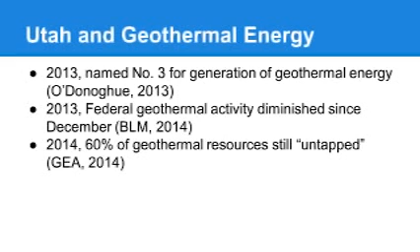According to the Bureau of Land Management's program overview for 2014, 60% of geothermal energy resources in Utah remain untapped. Important points worth mentioning are that Utah's leasing of federal lands for geothermal energy production has been highly competitive. Clearly, this means it's worth the trouble for any alternative energy investor.

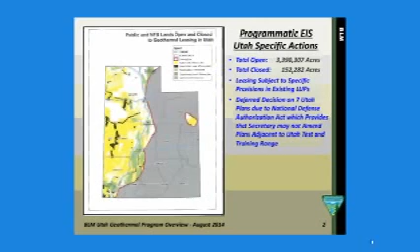From this picture provided by the BLM Utah office, there are still many lands open for geothermal leasing. These were the specific leases provided in 2014. This should let you know if investing in geothermal energy in Utah is a good idea for you. If you are interested, this is the regional power transmission infrastructure that exists or was proposed in 2012. It may or may not be different now.

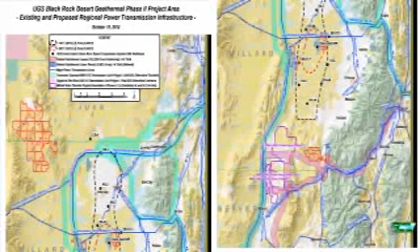Utah is definitely an option if you are looking into geothermal energy, and should be considered. We hope this information will help you make a better informed decision about your opinions on geothermal energy in Utah.

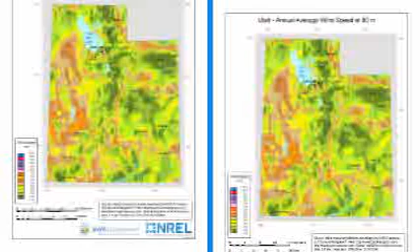If wind energy is what you're looking for, Utah definitely has the potential in several locations. We also hope this has helped you make a better informed decision on your opinion of geothermal energy and wind energy.

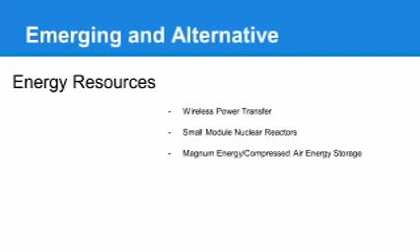There are a few new emerging alternative energy resources which look like they could be very promising for the future. The 3 that I'm going to talk about are wireless power transfer, small modular nuclear reactors, and compressed air energy storage. Utah is blessed to have some of the best science and technology research and development departments in the country, including Utah State and the University of Utah.

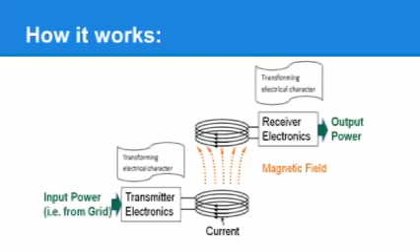Another possible solution to intermittent energy of renewables may be Magnum Energy, which is compressed air energy storage underground. Compressed air energy storage is a bulk energy storage technology that enables the storage of off-peak power from renewable energy sources like wind and solar. The CAES process involves converting renewable power into compressed air that can be stored in commercial-scale solution mine caverns. This stored air becomes an energy reserve that can be released to produce electric power at any time.

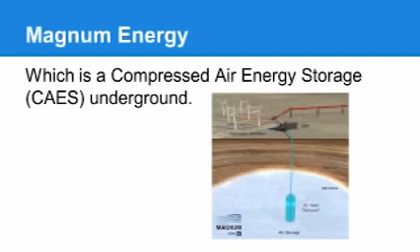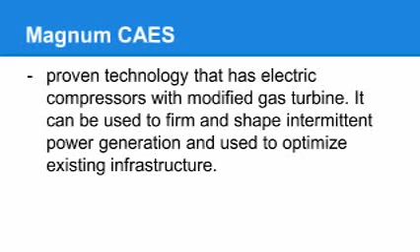Magnum CAES is proven technology that has electric compressors with modified gas turbines. It can be used to firm and shape intermittent power generation and to optimize existing infrastructure. Currently, there are 2 operating facilities, one in Alabama in service since 1991, and one in Germany, in service since 1978.

Large-scale nuclear power has been around for several decades, and there is a lot of concern when it comes to a large-scale power plant, especially after the incident in Japan at the Fukushima nuclear power plant in 2011. However, there has been a new kind of nuclear power which several countries and states within the United States are turning their attention towards, including Utah.

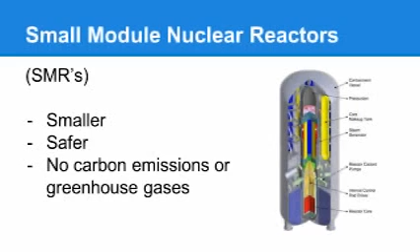Small-scale nuclear reactors are what we are speaking of. Yes, the power is still nuclear, but on a much smaller scale. With nuclear power, you have a constant supply of energy which is safer for the environment due to no carbon emissions or greenhouse gases.

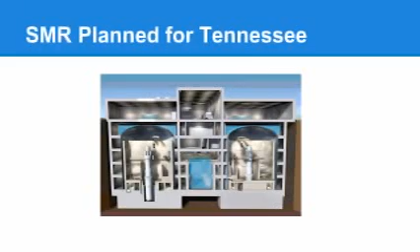Small modular nuclear reactors, like the one illustrated here by the firm Babcock and Wilcox, bring together components that are usually housed separately at full-scale plants. Like Tennessee, engineers everywhere are hard at work in hope that they will lead a new energy future. 'SMRs are a very promising direction that we need to pursue,' said U.S. Energy Secretary Ernest Moniz at his confirmation hearing in April.

Nuclear power is usually big power, so the effort to downsize marks a significant change from business as usual. 4 of the 10 largest electricity stations in the world are nuclear powered, and the average size of U.S. nuclear reactors is more than 1,000 megawatts, large enough to power about 800,000 U.S. homes. The smallest U.S. reactor in operation is the Fort Calhoun station in Nebraska, which is more than 500 megawatts.

Along with a smaller and safer design, a safety zone has been established, necessary for any SMRs that are to be built within the United States.

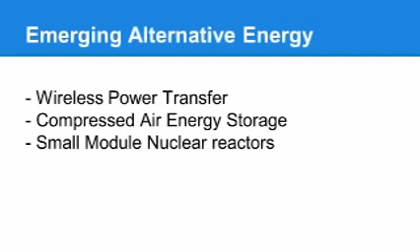As we discussed, there are many new and exciting alternative emerging energy resources such as wireless power transfer, compressed air energy storage, and small modular nuclear reactors.

One advanced nuclear reactor design is a molten salt reactor. Molten salt reactors were designed at the Oak Ridge National Laboratory as a potential way to power airplanes, but that purpose was later given up on.

They use fluoride salt mixes as fuel, which contains dissolved uranium or thorium. The fuel salt is heated to above 500 degrees Celsius and becomes a liquid, which carries the heat out of the reactor.

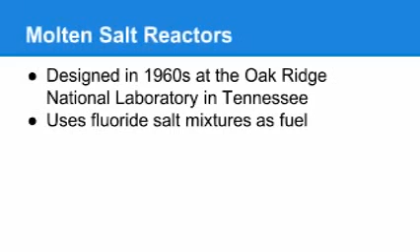Because the fuel is in liquid form and is actively heated, if power is cut or removed the fuel will solidify, thus stopping all reactions. Another safety measure comes in the form of an actively cooled plug that will melt if power is cut and allow the liquid fuel to fill emergency tanks and solidify.

One company, Transatomic Power, has been conducting research into molten salt reactors and has been researching alloys that would retain structural integrity in the harsh reactor environments.

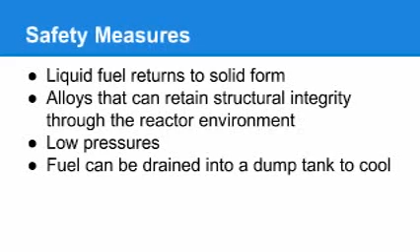Because the reactor environment is not kept under pressure, there cannot be explosive pressure leaks that eject radioactive material into the atmosphere and environment. The fuel itself carries more heat than the same volume of water. It is not damaged by radiation like conventional fuel rods and does not react violently when exposed to air.

Another advanced reactor type is the thorium reactor, currently being researched by India, where thorium is vastly more abundant than uranium. Thorium can be bred to create more U-233 than it consumes.

The process of breeding involves injecting a thorium-rich environment with neutrons, which converts the thorium into fissile material.

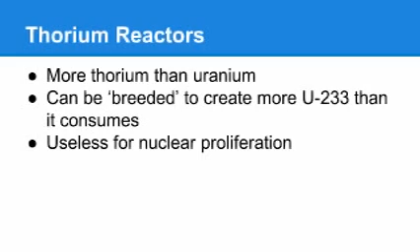Because thorium is fertile instead of fissile, it is useless for uses in nuclear weapons. Any scheme for using thorium as a source of fissile material for a weapon would require a way to combat the incredibly dangerous gamma radiation that results from thorium being bombarded by neutrons.

Thorium reactors have a built-in safety system due to the fact that thorium will stop producing U-233 if it does not get bombarded with neutrons. If power to the neutron injector is cut, no more U-233 will be produced.

One of the benefits of a thorium reactor is that it produces less waste than conventional reactors, and thorium itself can be used in molten salt reactors.

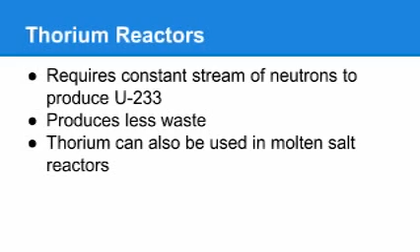Solar energy. What is solar energy? Solar energy is drawn from the sun's solar radiation. Solar energy uses photovoltaic panels to capture the energy and store it in rechargeable batteries.

Because solar energy draws its energy from the sun, it has to be light out in order for the panels to collect energy. Solar panels allow photons, particles of light, to free electrons from atoms, which in turn generates a flow of electricity.

Solar cells use silicon, boron, and phosphorus to help create energy and then send it to metal plates that capture the electrons and pass them to wires that store the electricity in batteries or flow directly to the source that needs the energy.

Is solar energy affordable? Solar energy, like most other renewable energy resources, is very affordable because it comes from an infinite source that requires no work other than manufacturing the solar cells and then installing them to obtain the source and then transform it into energy.

In Utah, companies like Rocky Mountain Power also have incentive programs set up that offer certain benefits to people who use solar energy to power their houses. The Solar Incentive Program provides a large amount of money in grants that are awarded each year to people who choose to use solar energy.

Implementations of solar energy. Solar energy use is rising in the U.S., and in many places like our own Weber State University, solar panels are being used to generate a portion of the electricity that is used.

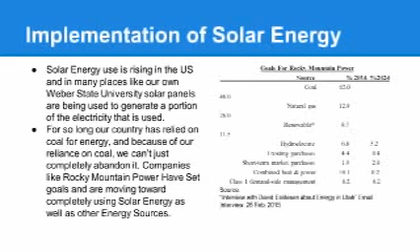For so long, our country has relied on coal for energy, and because of our reliance on coal, we can't just completely abandon it. Companies like Rocky Mountain Power have set goals and are moving toward completely using solar energy as well as other renewable energy sources.

Renewable energy: what can I do? What you can do to help renewable energy be implemented is write your local government representatives and tell them that you would like them to support renewable energy in your state.

See what incentives your power company offers you so that you can switch to renewable energy, and inform other people about the benefits of these renewable energy sources we have told you about, and that they are necessary in order to secure a clean and sustainable future.